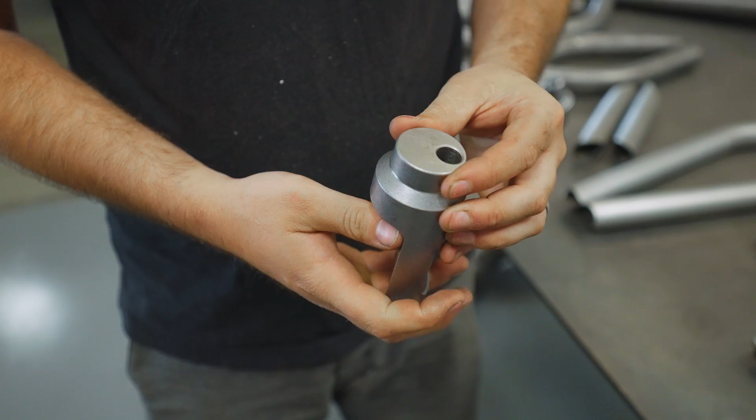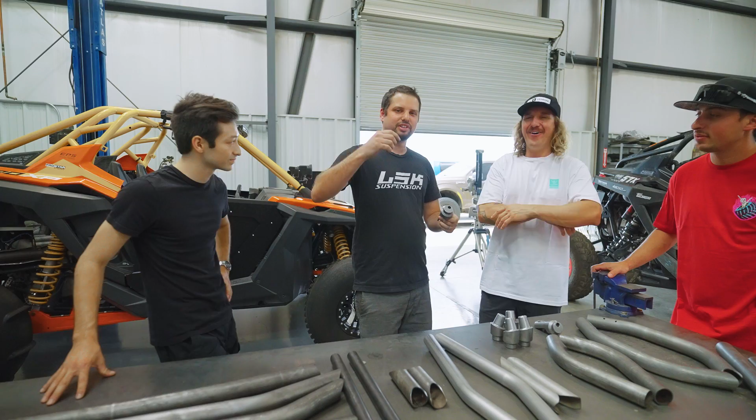You didn't even tell me that earlier. Yeah, that is sick. So helpful for people building their cage, keeps things clean. If you're putting your cage together and you have a roof light, you can punch a hole, pass some fishing wire or welding wire down through it. So when you're done welding, you just pull your cable right through, just like pulling through conduit. Makes it super nice to keep it clean.

I didn't even know that. Yeah, and on this car we have the rubber boot at the A-pillar, so all your wires are totally hidden. It's pretty sleek. That's tight. I'm excited.

The rear bungs are a little funky on these cars. We actually have two different versions that look almost identical. The rear and B pillar bungs are slightly different, and the only difference is actually the hole diameter. So it'll be pretty obvious when we get there, which bolt we pull out and where they go.

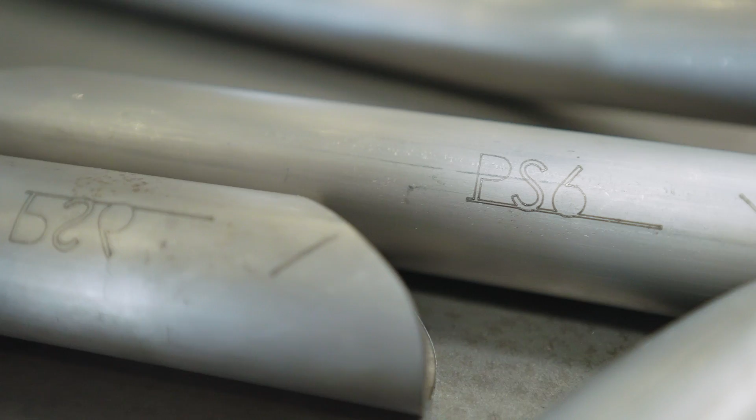As far as the tubing goes, everything is laser etched with a part number. You can see right here we have PS6, so for this particular cage it starts with PS, and this is tube number 6. We'll have a PDF in the box showing that this is tube number 6. If it's written backwards like this one, that means it's a passenger side tube. If it's written normal, that's a driver side tube. So it should be possible to figure out how they go together even without staring at the PDF for too long.

So this cage will be available to ship to you or to a fabricator of your choice, which makes it easy. It's laid out so you can do this in your garage, or someone can do it in a shop for a customer, and have exactly what we're going to be running on our Pro R. That's sick, that makes it easy.

Sweet, and I'm gonna be a little harsh critique on it, even though it's your first cage. Let's do it, let's see how this thing goes out. But also just seeing these tubes with the different alignment keys, which you can see here, makes this super easy. And you guys got centering marks too.

Yeah, so for example this is the visor bar. We actually have a laser etch mark in the center, so you don't have to pull out a measuring tape and find the center for the window bars or the center roof bar. You can just gauge it right off that etch mark. We're just trying to make it really easy. Same thing with stuff that we didn't think needed to be keyed, we actually added lines that match up with lines on the tubes as well. So it's kind of just like a guide.

You can use these if you want, so it matches the computer, but if it comes up a little different, at least you can reference what you did.

That's tight. Adult-sized Legos. Love it.

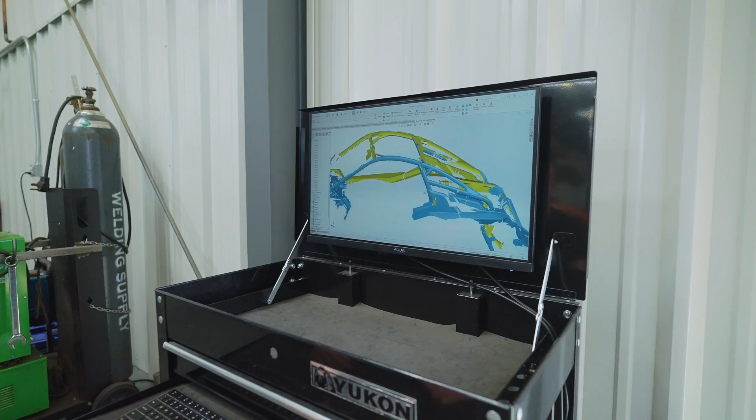Okay, so we're going to go over what we did to develop this cage. We have a Faro scanner, and we scan the car with a factory cage on it. This is a picture of the mesh or point cloud that we got with the scanner, and it gets us all our factory points, our factory cage, and all the body lines, so we can do things like windshields and get all the tubes to land where they're supposed to.

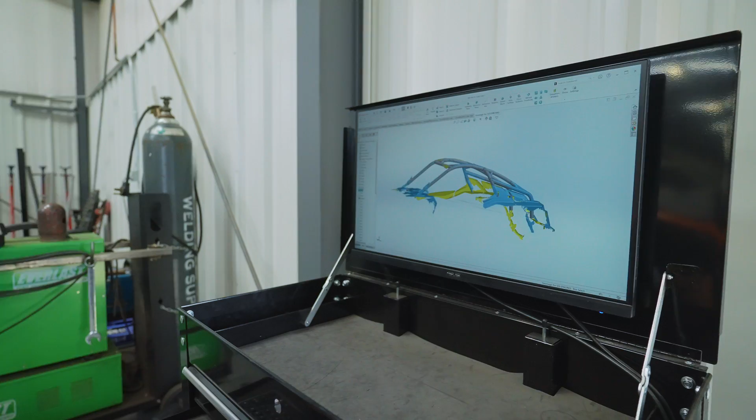So from here, what we do is we take our mesh and rebuild the actual factory cage in it. Let me hide this. You can see we actually rebuilt that whole factory cage just for being able to pick up all the points that we needed. So when this is all done, we bring this back out to our assembly that we build it in.

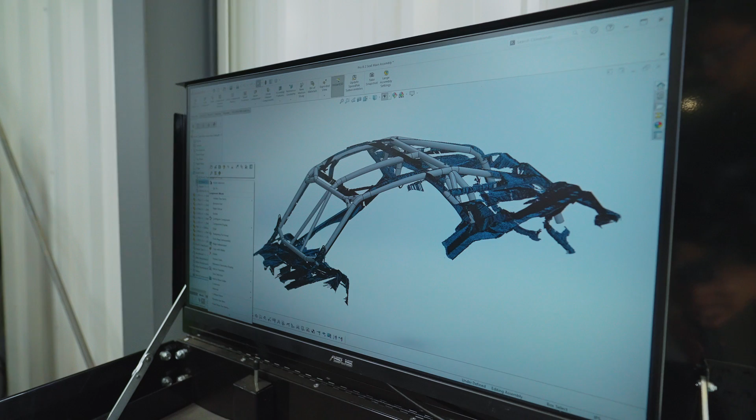All right, so here we have the overlay of our new cage onto the old cage. We bring in all of our pivots, and we build the cage to land on all these pivots.

These are the 5-axis machine pivots that we talked about earlier. You can see we're lining up all the lines, putting etch marks on them. You see the part numbers on the cage.

So this is part of the development. We key the tubes so they key together, just trying to make it as easy as possible for anyone building it directly on the car to put it together.

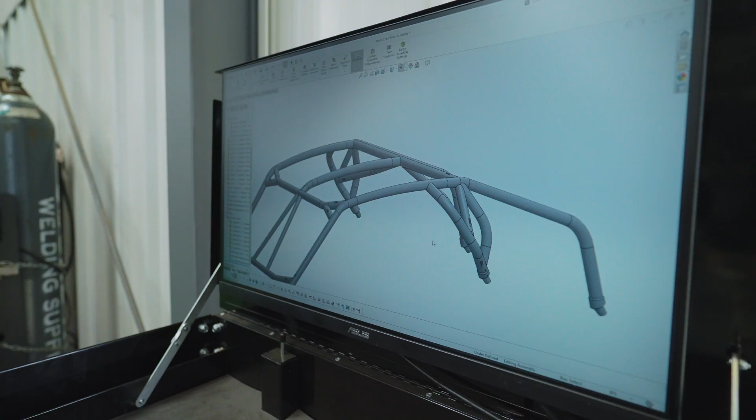As far as design goes on these, we take into account trying to make this cage strong and sound. On this cage in particular, because it's a heavier car, we defaulted to 120 wall main bars, and also on the B-pillar, so we kept them thick. On the other tubes, we went back to 095, so all the main bars and the B-pillar are 120 wall.

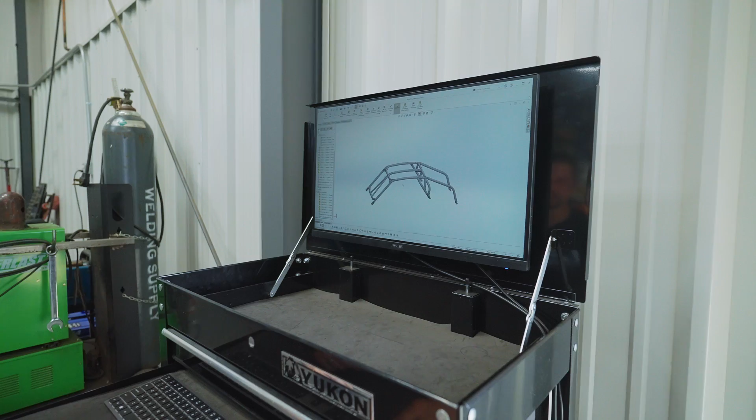So that's the gist on how this goes together, and once we're done with it, we send it out to our laser, cut it, bring it over to the bender and get it bent up.

Sweet, show me this thing. Yeah, so this is the Faro scanner. What we do is we actually position it close to the vehicle.

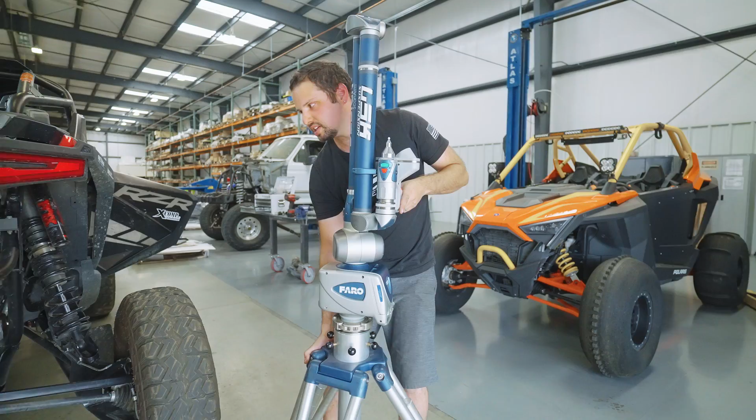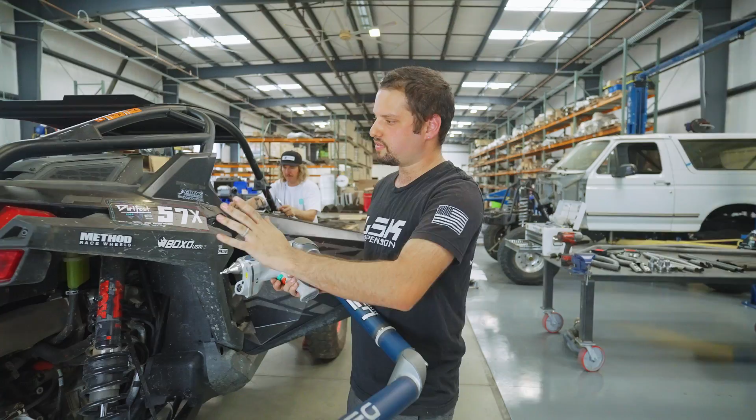This has encoders in every single joint, so it's a real-time way of measuring something instead of just holding a handheld that's looking for targets. This actually knows where it's planted. The downside is you have to move it around the car and stitch it all together.

That thing is like NASA shit, dude. Yeah, exactly. So we scanned everything.

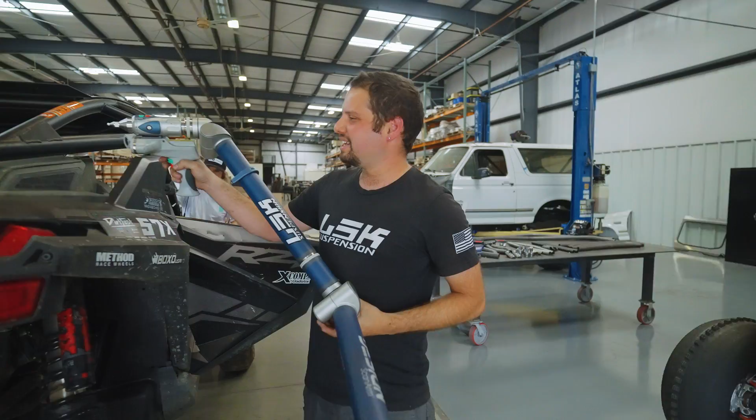It's not on right now, but there'll be a blue line on here. We'll scan the cage, pull it all up in the computer, and then it's pretty much just like having calipers in the computer. We just have something we can use to pick measurements off of, and it works really well. It's a bit of a learning curve, but it definitely helps us in development with our cages.

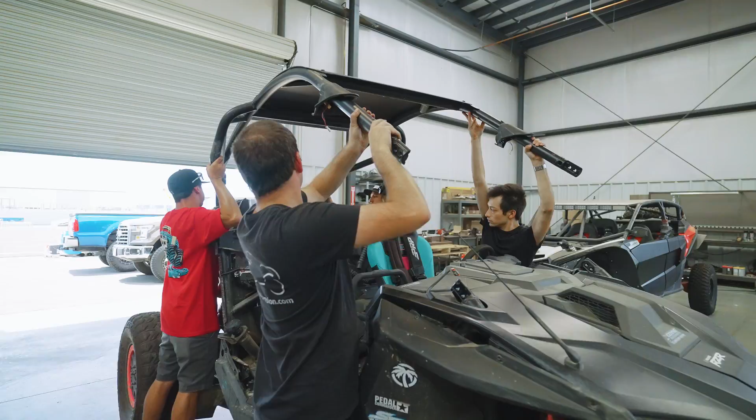That's it, dude, she's off. All right, now the fun part begins.

We're gonna bolt up all the anchor points using factory hardware. She looks so naked.

Convertible baby, drop top. And we're gonna utilize these clamps that Aaron and UTV Distribution machined out, the ones you guys saw some beauties of.

Let's bolt this shit up. Come on, Harry.

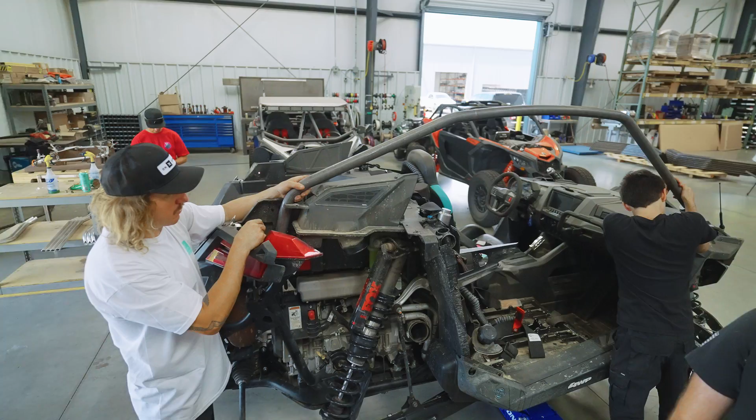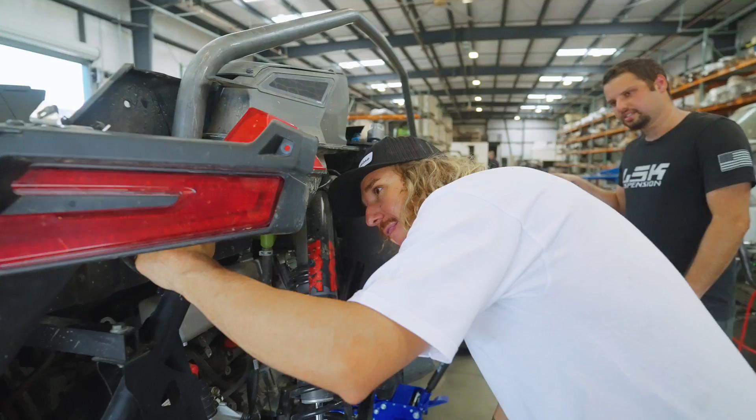First main tube is in, and the profile looks sick. So, as Aaron was explaining earlier, there are identification marks on all these bungs to basically line the tube and the bung up to make sure your rotation is dialed.

So you'll see there's a line right here when we get to the B pillar. You'll see an etch mark on the tube, so it gives you an idea that you're clocked correctly, because these can kind of go in different orientations.

One of the things too we did is when you take the factory cage off the car, you're gonna see the center of the car just drop, like the bungs just get closer together. So we put a jack in the middle to help separate everything back to the way it was out of the factory. Helps the cage pop on there a lot easier.

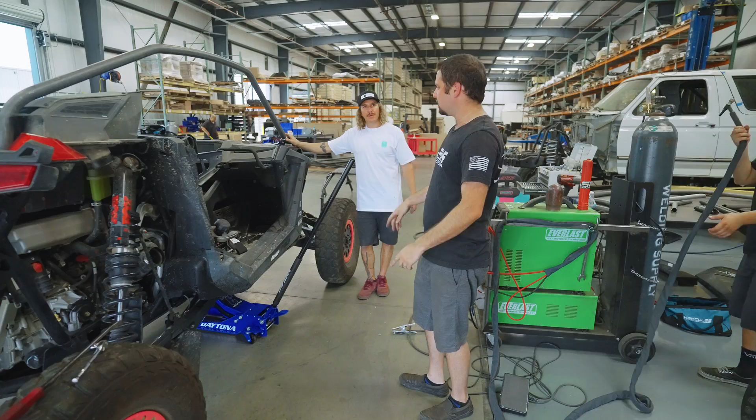Once you get over that lip, it just snaps right in. Snap right on in, brother. Snappy.

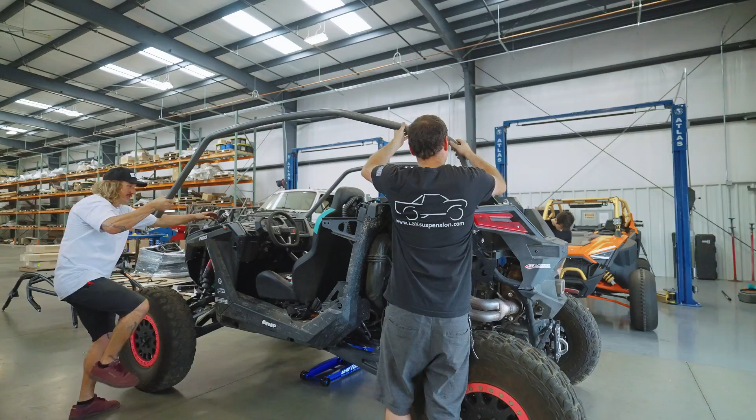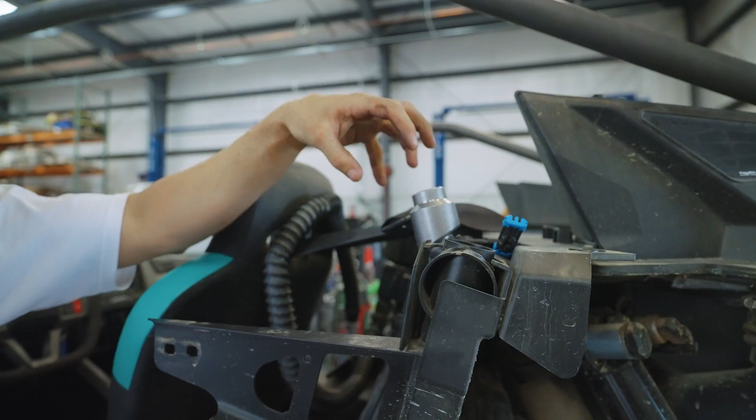Is the second side gonna fit or what? Oh yeah, woo baby, look at that! And the nice thing about these versus other cages, this step right here gives it a lot more strength and structure to not shear or break. And it's got a huge fillet weld, so you can get a really deeply penetrated weld, and I'm sure that was part of the plan.

Yeah, absolutely. Sick! He said if these fit, the rest is dialed. This is the very first of this cage, this is the prototype, and hopefully it's the final. But now we're gonna use these keyholes up here, get our next tube in the center, make sure it's all squared up, and then we just build from there.

Sick. Have you guys met Miguel? Miguel, what's up dude? He's the master TIG welder here at LSK and Cal West Manufacturing, so I'm sure you guys keep him pretty busy. Yeah, Miguel's a great welder, so I'm excited for him to weld in this thing.

Most people probably MIG weld these, but he's like, if you have the time, we can TIG weld it, and I'm like, I got the time. Let's make it nice.

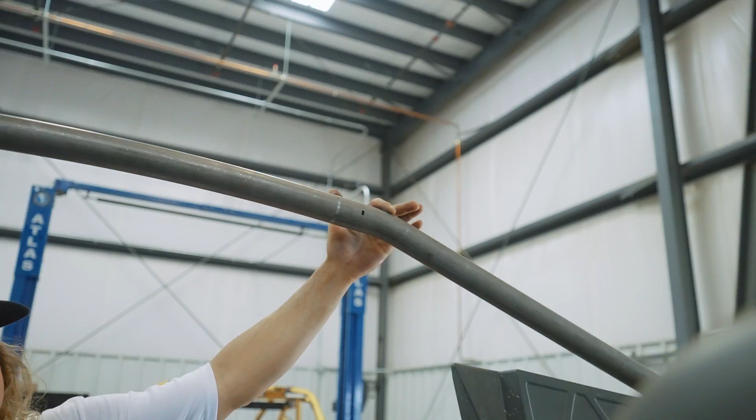Cool, all right, so on this tube, this is the crossbar behind your head. We have keys on the end of the tubes on both sides, and a part number on this tube as well. So we don't go too crazy with the keys, because after you get this tube in, everything kind of builds off of it. This helps you get set up, and then everything forward just kind of fits together like a glove. So let's see what happens.

So you can see the keys curve. This key is going to go on that side, and the part number is PS3. We're going to put all the part numbers on the driver's side for the tubes that are single.

A little back a little bit. Oh, it's beautiful bro, and it's like it locked stays in place, it's locked in. So we'll use this as a chance to square this thing up, make sure corner to corner that it's square, and then from there it should be pretty easy going.

Since we got the old cage off, after we bolted these in, we're less than 5 minutes into putting these in. We're gonna have this thing together pretty quick. We're cheating right now, but I like it because with how busy I am, being able to work with these guys—they did the whole roof line of the TT bug, bent it, radiused it, the whole shebang for us, and that worked perfectly. Knowing what they know, this saved me like weeks of time, and I don't have it.

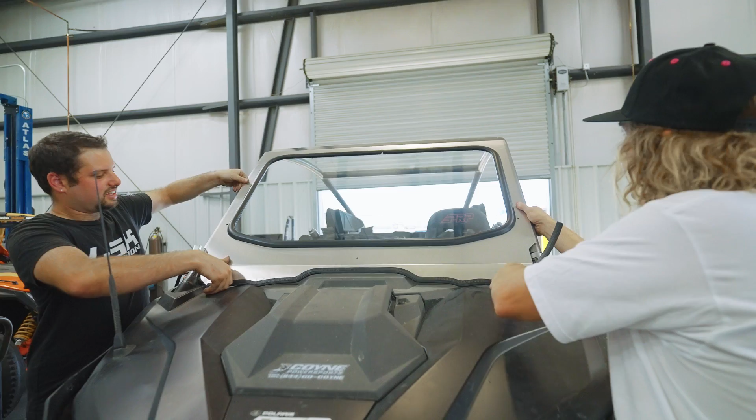You on the computer? Yeah, so I just added material on the side. Oh, fuck yeah. Damn dude, damn, dang. Brian, how badass is that?

The trick factor about this is automotive glass. So it doesn't shatter, it stays together. So if someone spits out a baseball sized rock, it's not gonna go straight through it and shatter in your face. It's gonna be like a car windshield where it just spiders, but it still holds together, and then you gotta kick it out to keep going, like I had to do with my old—did you?

My old Chevy, I rolled it at the Del Mar Fair Tough Trucks in like 2006 or some shit. Holy cow. In high school. And luckily I had a pair of goggles behind the seat, so I kicked the windshield out and drove it home, because I drove it there from East County. So I drove it home with just goggles, mobbing my Chevy that I just rolled at Tough Trucks. I felt like such an idiot.

That's awesome. Well, we hope you don't kick this one out. I mean, Will will probably have to kick it out, since Will's put it on its side. You know, I might have to, maybe.

All right, you guys want to go see some laser stuff? We're gonna take a short break right now, get a couple things situated, grab some lunch. But they have the laser running right now, and they're also bending some stuff. So we'll show you guys their laser machine that makes all these tubes to the T, to perfection, as you can tell. And the bending process, eat some lunch, get back to it.

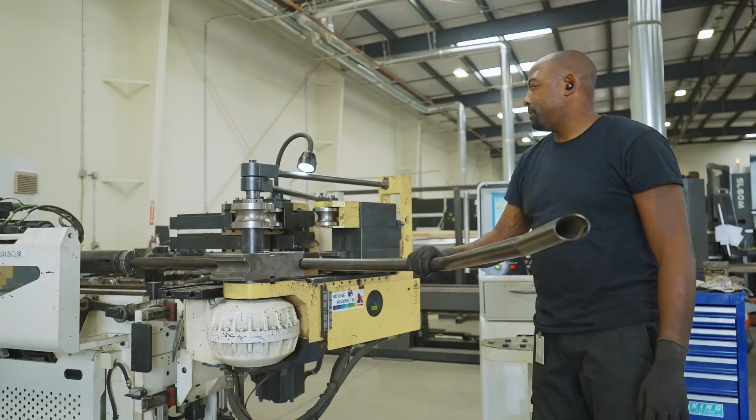They laser cut it, and then it's transferring from their bend to their radius. So this is the roof line of another cage of some sort. Yeah, this is an X3 cage for another customer.

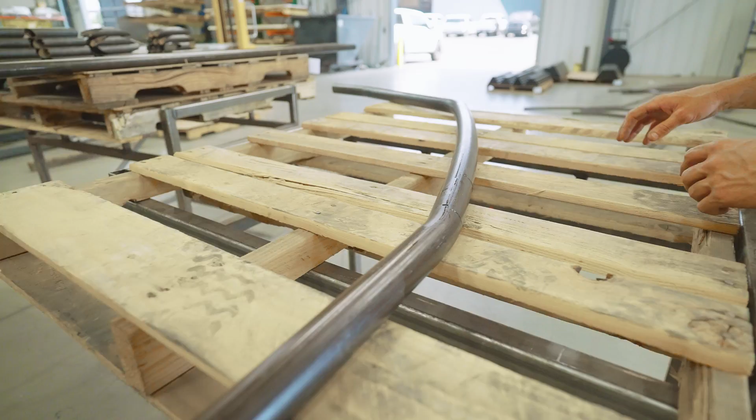You can see the different rotations as it's going through. They set it up with an indication mark, right? Yeah, we have actual marks on the tube that we line up on the bender. Then from the computer we send over the bend program, just like a CNC program for a mill, and then we run it. It's going down right now, check it out.

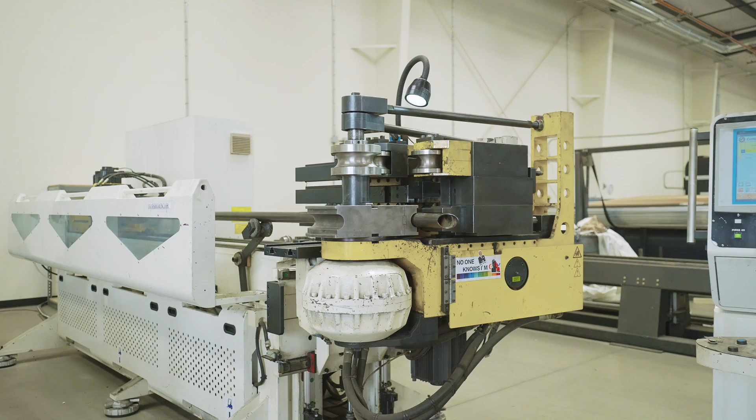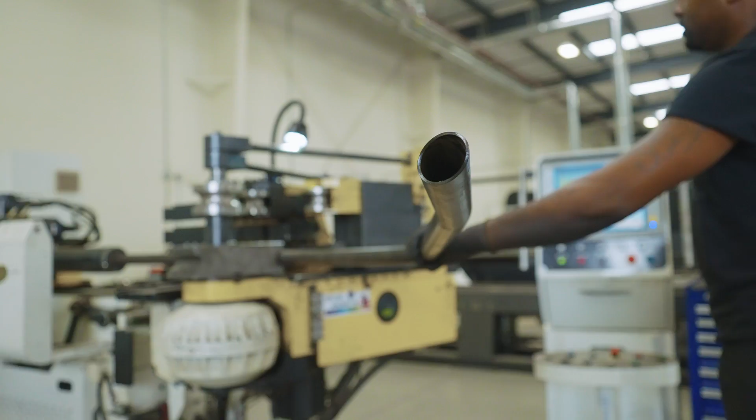Back to bend, with a little bit... that's the coolest shit ever, dude.

As you guys just saw, the tube bender and roller. Another cool thing my man Aaron did here as his college senior project. Yeah, senior project in college. He built this entire fiber optic laser.

Fiber tube laser. How long did that take? Probably about a month. And you were 21, 22? Yeah, 22, and he built a freaking tube laser, bro. I told you, these guys are so goddamn smart.

They've also built a ton of robotic stuff, mostly for aerospace. So in the assembly line for certain fasteners or hardware, we have robots that we install that do a lot of the handwork. We use the robot on this one to help us with the loading.

Did you build this robotic loading arm? Yeah, so we got the arm and then we built all the end effector stuff for picking up the tubes. He's got a little touch screen that tells it what size tube, and it goes in, picks it up, and puts it in the machine for him.

This shit's so cool. If you're into any form of motorsports or machinery stuff, knowing that these guys build it, develop it, and manufacture it under Cal West, this building, aside from LSK, that's just fucking sick. Thank you, man. All right, let's see some shit cut, dude. Cut some shit, baby.

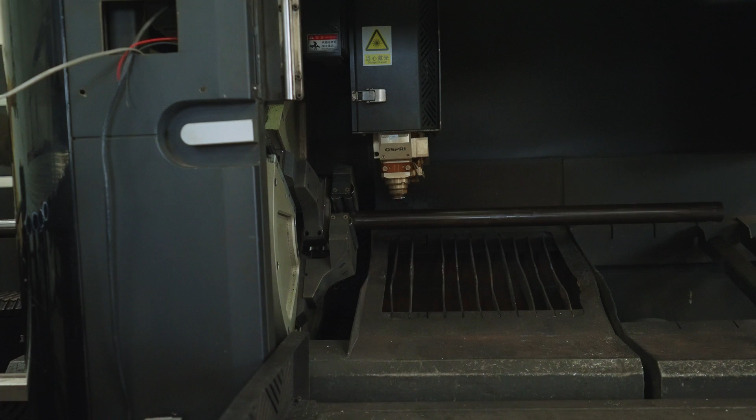The first ones were for bolts that went through? For the bolts on the X3, yeah. Bolts on the X3, so this is the cage bar that's getting bent right now.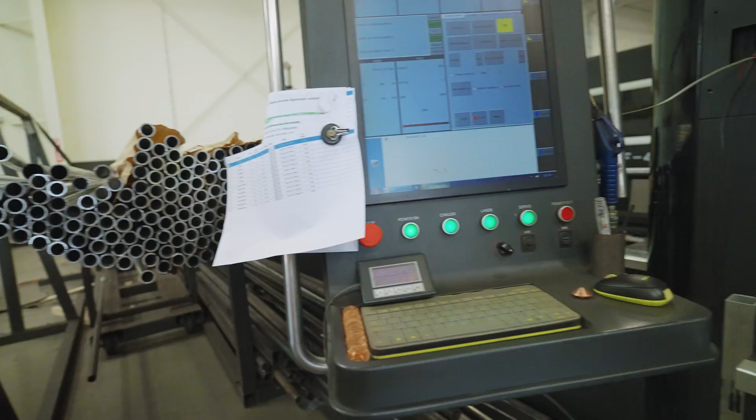So as they're being cut, how many of these... let's see the cut quality on the end of that. Dang, fresh engraving, just like that.

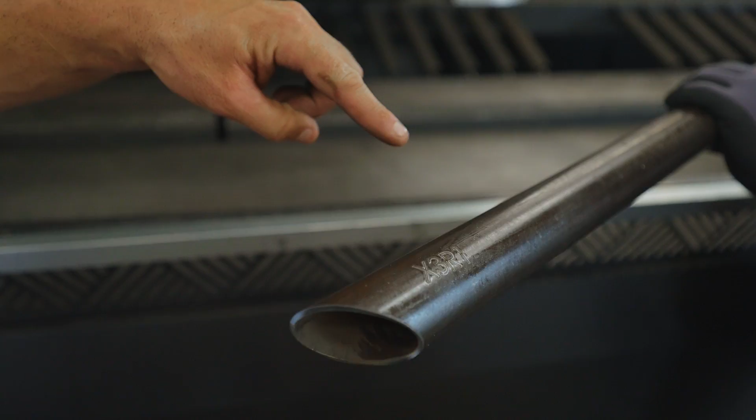Oh, it's so beautiful, it's so beautiful. Have you ever seen this? I'm like speechless. Have you seen anything like this? No, not at all. How long do you think it would take me to notch and bend tube?

We'd be spending like 3 days building a cage together, easily, for sure, 2 people. You guys spit them out pretty quick. Yeah, and on chromoly tubes for a tube chassis for the race car, we'll nitrogen cut it so the cut comes out nice and shiny and clean, and doesn't take much cleanup work. Still got to clean the outside, but other than that the end is nice and clean, it's a really nice setup.

All right, so this is our plate laser department. We have 2 fiber plate lasers, one that's 6x12, one that's 5x10. We nitrogen cut all the chromoly parts here.

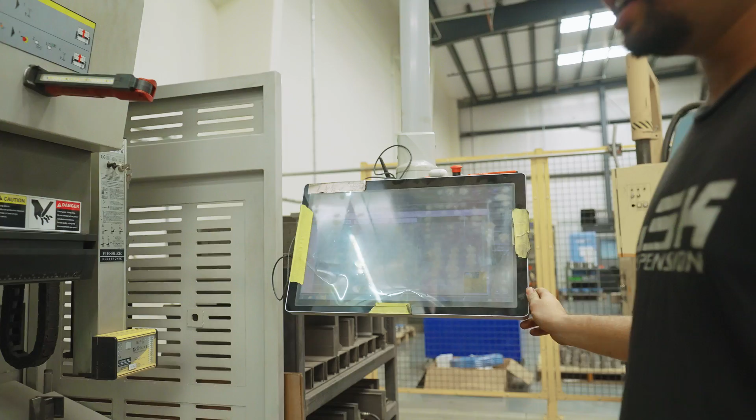We're able to upload the SolidWorks models right here to the bender, and have the 3D model. It'll tell the operator where to put the tooling and move the backstop to the correct position. So it's pretty cool, fairly automated for what it does. We have 4 welding bays over there.

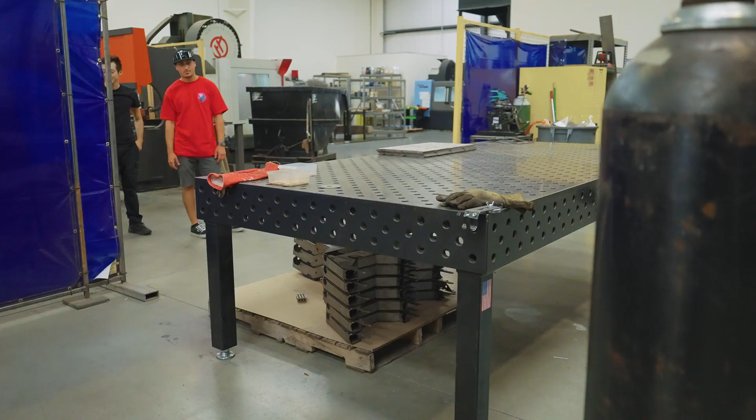So we weld all our products in these 4 bays, and if we have bigger projects, we'll weld them on these Siegmund tables. These things are incredibly flat, we love them. Over here we have some manual equipment for if we need to adjust anything or make some custom parts. They're actually cleaning this area up right now, but we have a manual lathe over here with a DRO and a manual mill over here with a DRO as well.

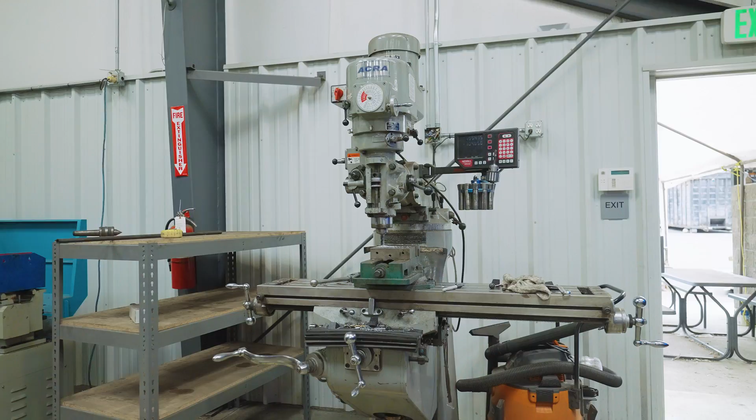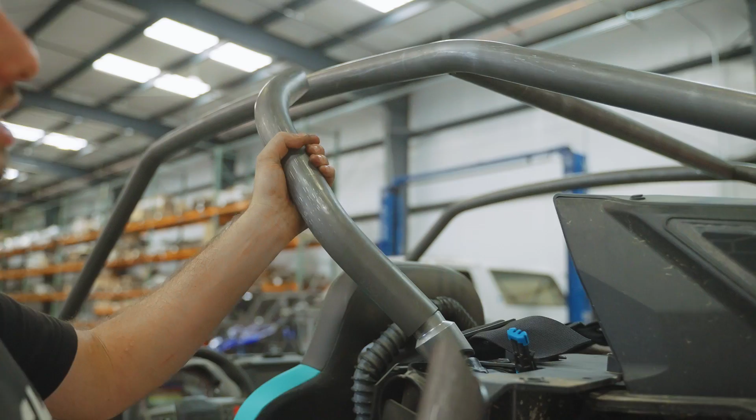Okay, so we have a laser etch mark right here, it's kind of faint to see it. And then we have a mark on this tube as well, so we're gonna use this one. We're just gonna go until it hits the tube, and to make sure we get our alignment good, we're gonna drop it in this bottom keyhole, then line up this etch mark up top, and then we know we're all in the right spot. So there's the etch mark, we can go ahead and tack that when you're ready, Miguel.

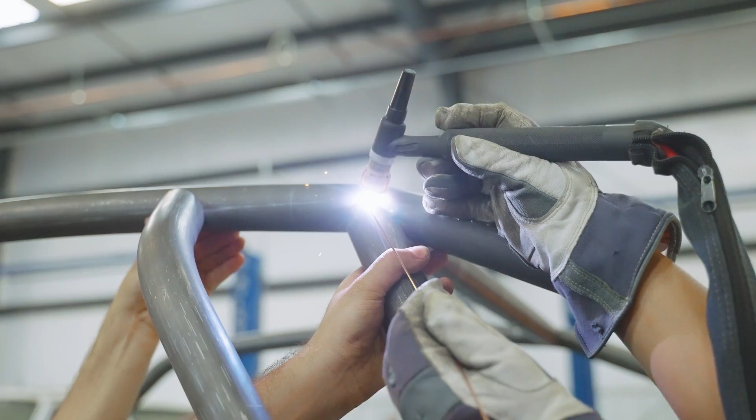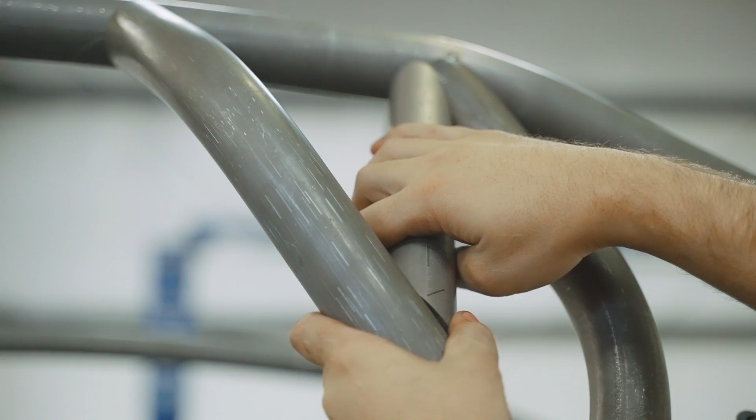Yeah, so we definitely beefed it up. On the Pro XP, there's a bar here, and the bar is laying on both of them. So what we did on this one instead, we don't have anywhere to land, so we had to come in and kick it. Now this point is connected to this bung, so it makes it nice and strong. And then we have a gusset tube that makes it parallel. So there's another laser etch mark right here, and it's gonna line up to the mark on the tube. That fits amazing, yeah, perfect.

It's amazing. So now you have a MIG welder, you're just like flap. Yep, but we're going the extra mile and TIG-ing it. All right, Miguel.

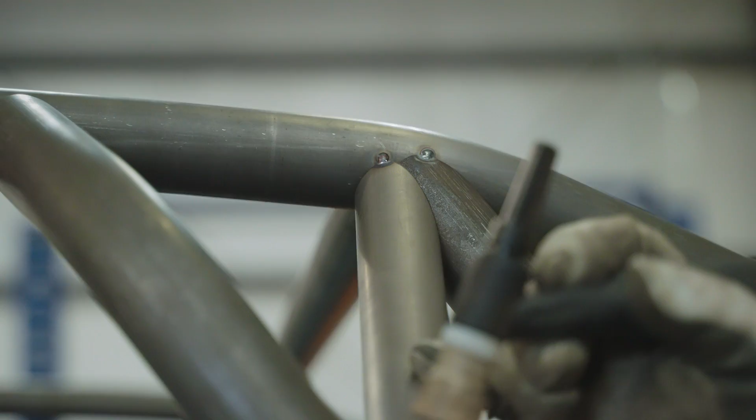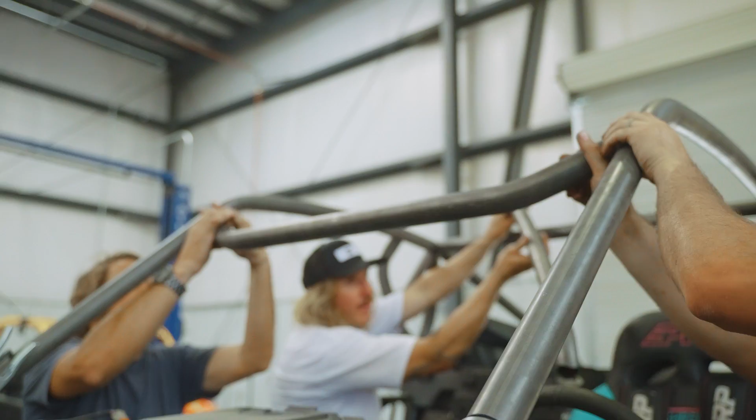All right, so we're gonna put the visor bar between the main bars first. He's got keys on the end of that tube. He's gonna put in the keys on the crossbar, and then we're just gonna slide this bar up to join up with it.

Cool, and then there's a laser etch right in the middle, so you can crawl up there and we can get that bar centered on there. Oh yeah, dude, look at that. Wham bam, thank you ma'am. Only thing we need to do is just measure here to here, get this all squared out. We're good. Go up a little bit. Yeah, we're close, yeah, cool.

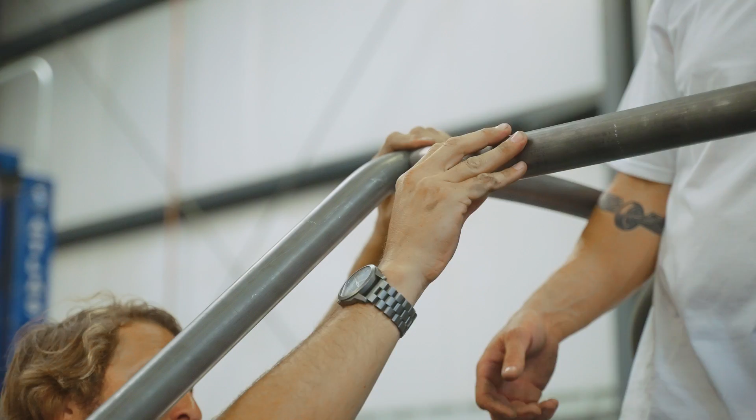Oh yeah, dude, shit. And then when we line this visor bar up, we want to be just, if we were eyeballing across the surface, we want it all to touch. That way all the windshield roof stuff lines up. If you have this dipped down or dipped up high, it's going to make a mess for doing a windshield on here.

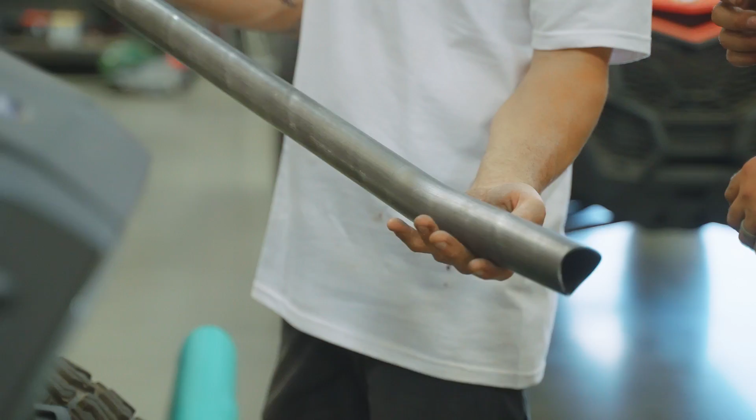Are we measuring this? You gotta take, I got this. It's going to go on the driver's side, yeah, right here. Part number on the driver's side, yep, because of the etchings, and probably have to use a little bit of a mallet. Is this a centering? Oh, there's a line on the tube too. Oh yeah, it's cheating, man.

We just gotta get it in place. I don't think it gets more dialed than that. Dude, you might as well not take that hood off, dude, we're moving so fast. You like that plane? Yeah, or wherever you want, hold on dude, we go, right there.

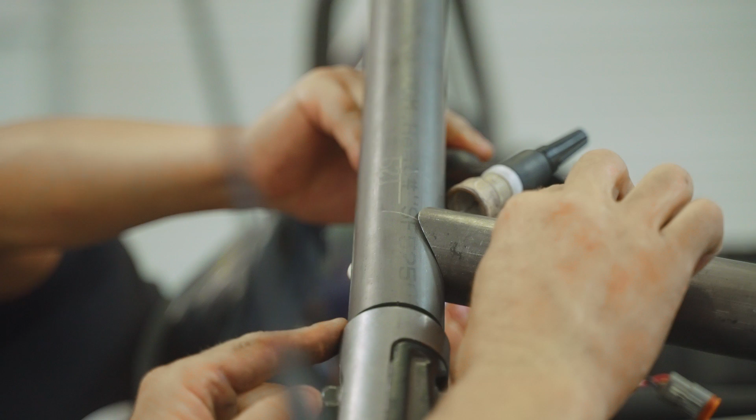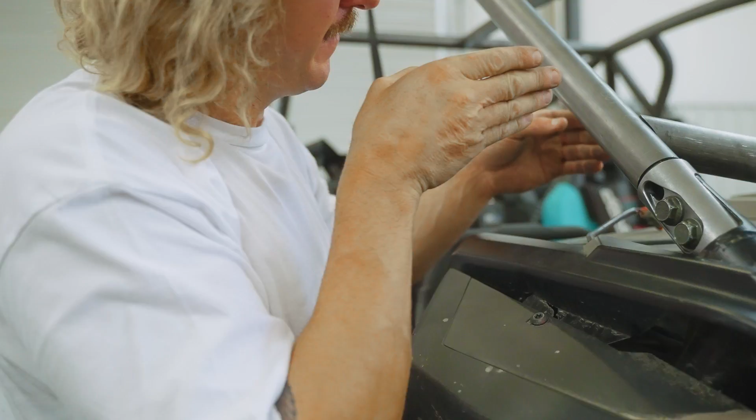Look at this, come here, look at this, look at that sight of that line right there. Can you even focus on it? Hold up, wait, now I can. Damn, easy. Line there, you good? Yep.

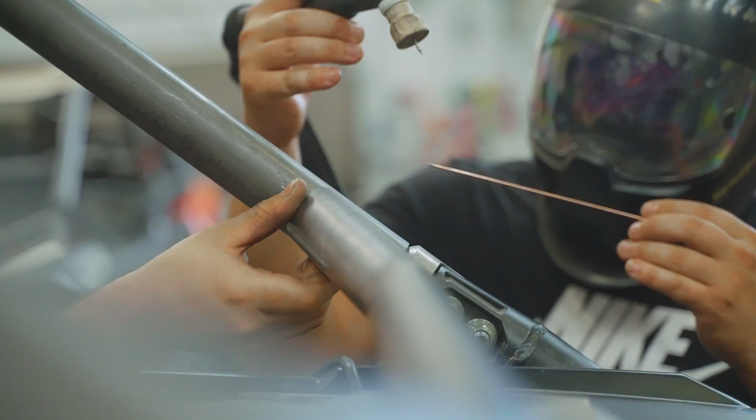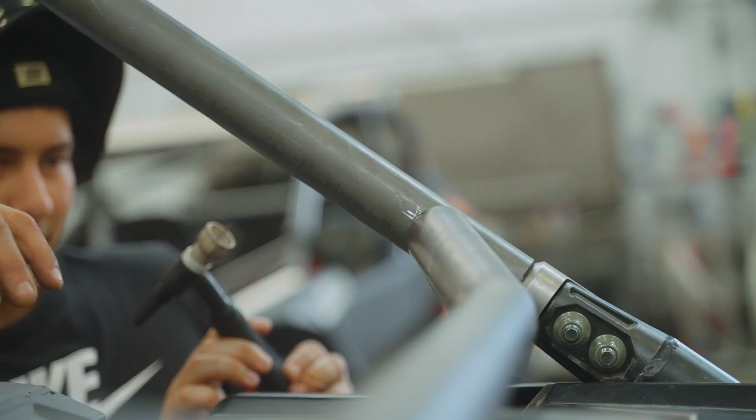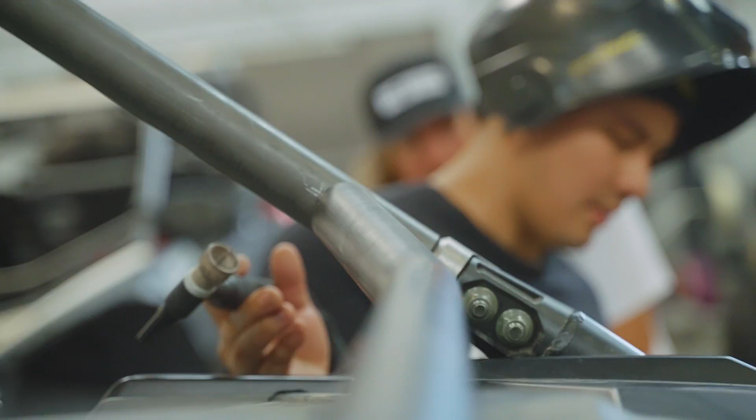I'll put a check on the bottom. Thank you, oh let me check the plane. Yeah, we're good. Oh baby. So sick.

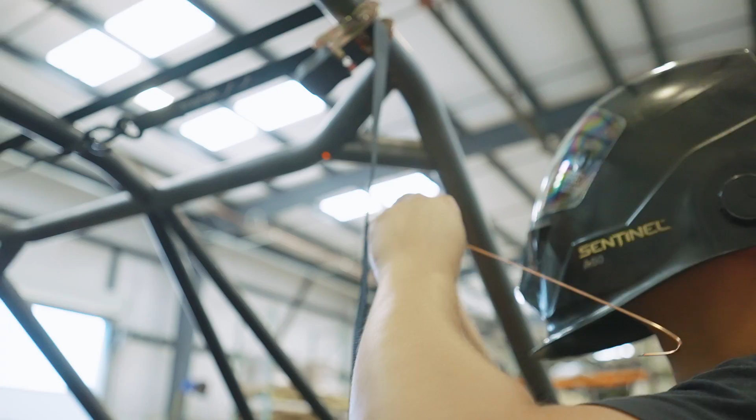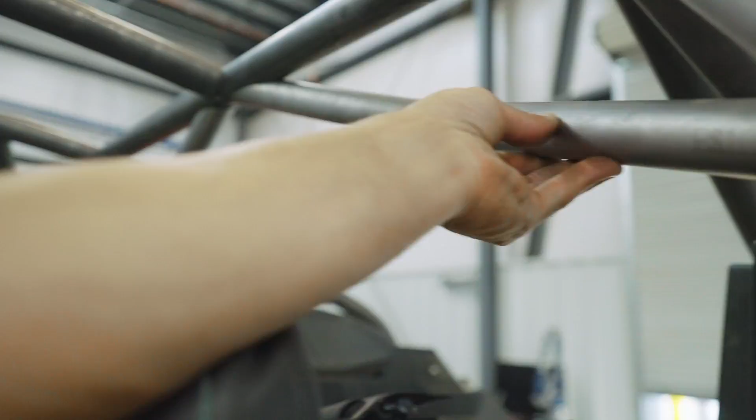Come check this out, look at these copes, look at that. That is tight, like, God dang, Gina. God dang, ready? Gina's my mother's name also too, by the way. She would approve, she would approve.

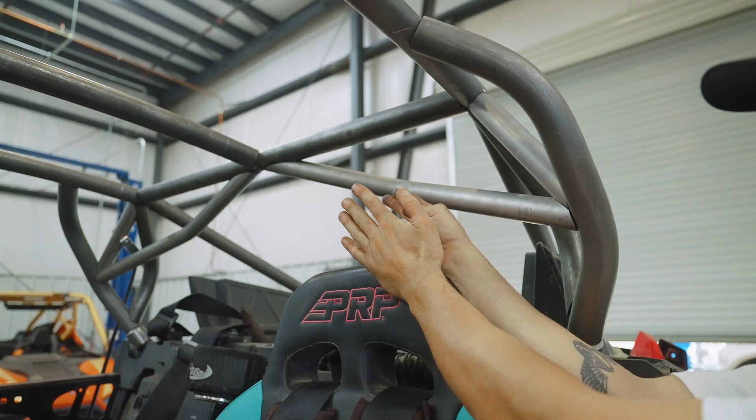So this will help, these tubes are going to help keep it from spreading apart if there is an impact on the back, and it keeps it side to side, whereas the stock cage, there's nothing really side to side from there up towards the center. And if you scoot the seat all the way back as well, it's behind, far behind the seat. So even if the seat does flex, you still got, from the back of the seat, 4 or 5 inches of head clearance. So unless there's a major impact, you're not going to hit your head on this thing. But the triangulation does so much for these.

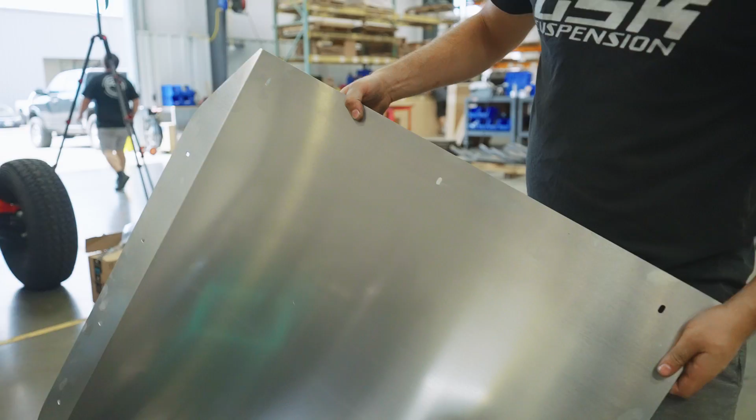So this is the roof. We have slotted holes in there ready for the tabs to go in. What we're going to do first is put it on top of the car and clamp it down so it takes the shape. Once we have a position, we'll finger tighten all the bolts and start tacking the tabs in from the bottom.

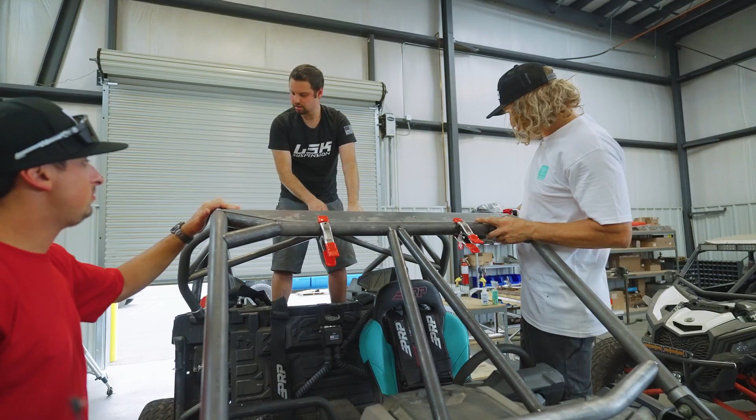We need to go a hair that way. Just a hair, like a 32nd. So little, right there, that's it. That's perfect. Yep, boom. We're getting really anal with it, just because this is the first one.

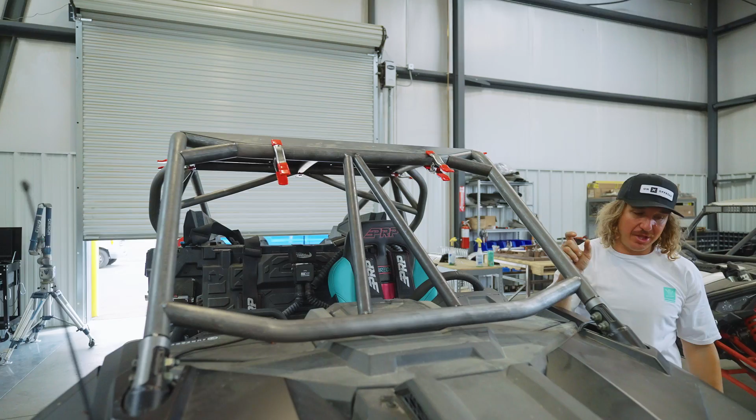So the roofs fit on, and then the holes have a slight slot to them. Basically you can pull the tab to the tube, so you can bolt it up super easy. Pull the tab to the tube, clamp it in several positions, and then weld those tubes on.

I can't believe how well this stuff fits together. We're taking our time. We got a lot of people here because we're trying to get this done, because we have a lot of other stuff to do today, and we're ahead of schedule, so that's a good thing.

Harry's stoked. He's pissed though because he wanted this cage, but he might get a different cage since he's had his car for a while, but now he wishes he had this cage. A little bit. Big cruiser guy now, huh? Big cruiser guy.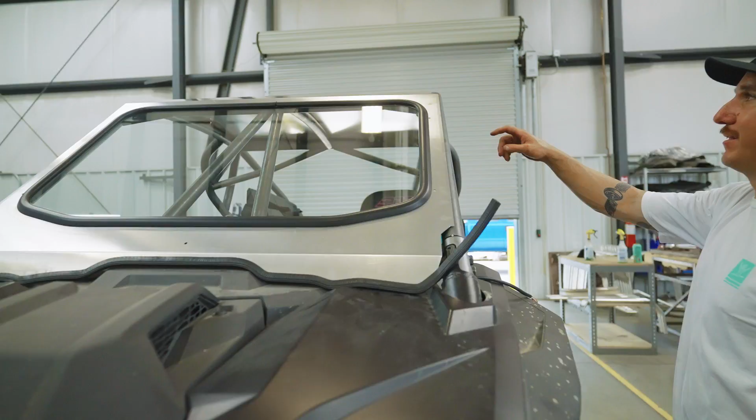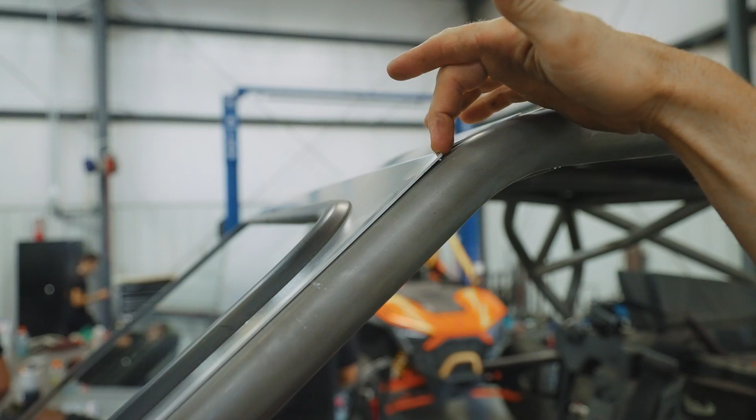Even look at this right here. Look how it notches out for the tube from the top. Move your hand - it's sitting on top of the button heads up top, that's why there's a little gap in there. But how they just laser cut out for the tube right there, it's the little things.

And also with that, it allows you to put a tab off the top corner right here if you want to put a light bar across there, or a bung, or something of that nature. Dude, sick, this is nice. Looking through there. Big windshield guy, big windshield guy.

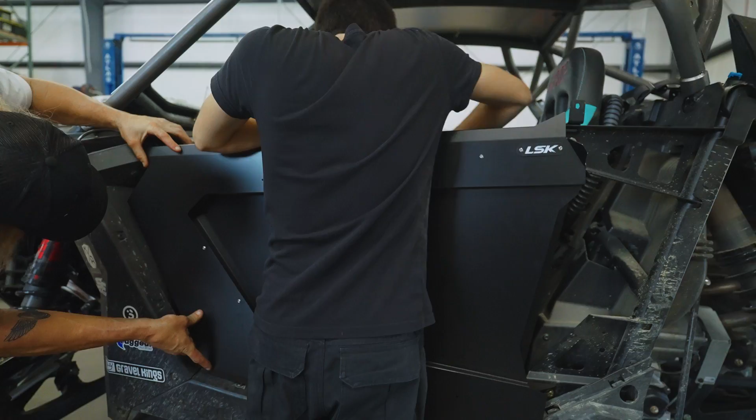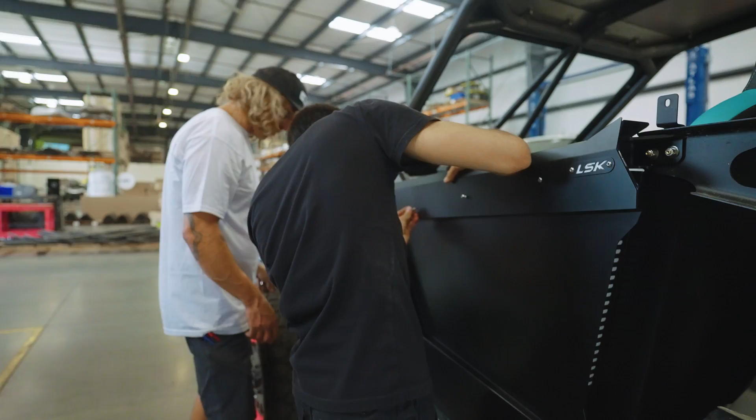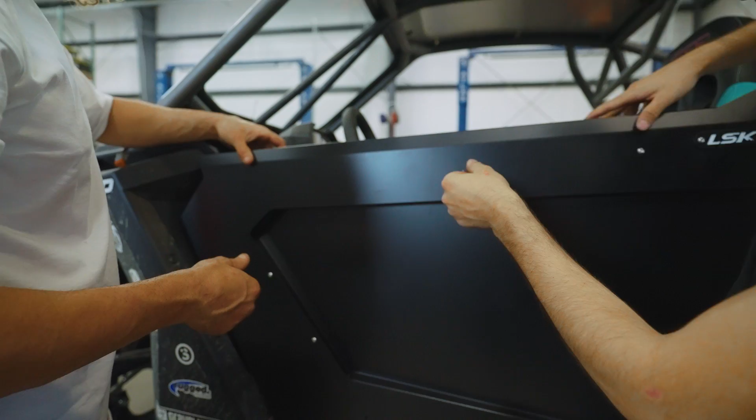What's happening? I like the new doors. So I heard these are all you. Yeah, a little bit different style. I try to do something with the scoop that these Polaris have. I usually see a lot of bulk up here, so I try to slim it down, give a flat top so you can stick your arm out the top.

Cruising down Oldsmobile Hill. Yes sir, yep, we're always cruising. The new windshield too, ooh, big cruising. Big cruiser dude, just gotta keep this mustache from flapping all over the place.

These boys crushed it. The fit and fitment of this cage is pretty rad. Cage, doors - you guys stoked on it? Yeah, it's good, stoked. It's a good day. Dude, it's been a spicy one today.

The sick part about these doors is this shock right here. Boom, so it doesn't hyperextend, and it just shuts and is solid.